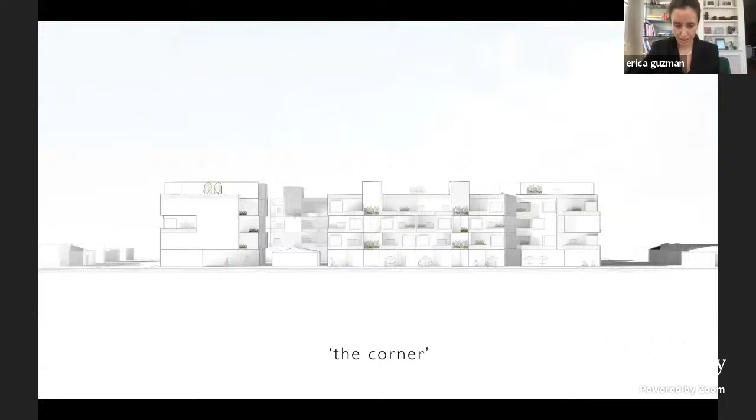You can see my screen, right? Yes, perfect. Okay, and you see it changing, right? Yep, yep. Okay, hi, my name is Erica. I'm a first-year undergrad under the guidance of Professor Jover. I'm sorry, I'm not an undergrad, I'm a graduate. I'm off to a great start. Under the guidance of Professor Jover.

This semester we focused on designing a collective housing unit that created opportunities for mixed use, collective amenities, and mixed income to cohabitate within an urban block. In creating the design for my intentional community, I wanted to avoid a prescriptive theme based on shared interest, as is the typical narrative of intentional communities. My thinking is we need less tribalism.

So instead, I started my design by analyzing which features make for the most desirable experiences within the urban landscape: a robust neighborhood with vibrant people, vibrant public spaces, easily accessible green space, but also private access to outdoor space, as well as a short commute time. This is how I came to the name 'The Corner,' in the sense that it is a coming together of many people, but it is also a reference to the geometry of the right triangle, which I explored.

To better understand the efficiency of communal living in small spaces, we designed 3 homes: the horizontal, the vertical, and the sectional. Both the horizontal and sectional homes directly inform the design of the urban block, both in keeping with the design features, but also further exploring the geometry. The horizontal home was a 1,400 square foot home designed for a family of 5, based on a riad-style inner courtyard with several porches off the private rooms. The sectional home was also 1,400 square feet, with a narrow footprint at the ground that evolved into rotating right triangles.

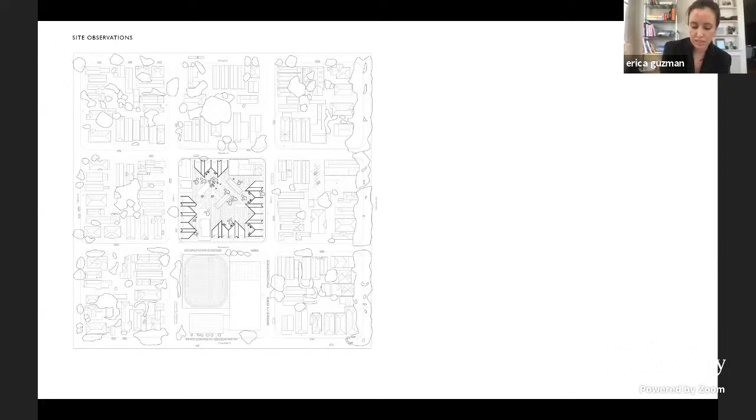The site, which was considered, is a populated, vibrant area with 3 existing properties. Like most of New Orleans, the porch culture is part of the built experience throughout the neighborhood, and I was cognizant of continuing this custom.

As for precedent, the scheme has evolved a good bit since my conceptual inspiration was Jean Renaudie's housing complex in France. I was fascinated by the mesh that was created within the structure and the other spaces, and I wanted to encapsulate this to fit within an urban block. I read that the architect also designed pocket gardens at the time, on each of the balconies, containing a depth of soil sufficient to grow trees. So it's very interesting to see how this has evolved.

The ground floor features almost a perimeter of public spaces accessible via the sidewalk. Inlets within the folds of the building create space for outdoor activities, specifically outdoor seating for cafes and restaurants.

One can access the vertical core from the sidewalks to enter the living space on the floor above. These vertical cores can also be accessed from the inner courtyard. There are 5 entrance points to the inner courtyard.

To allow for greater privacy, the corners of the entrances are all set for community use, not public use. The buildings in the inner courtyards are designated for community access for programs such as office space, gym, and clubhouse.

The various walkways were created by extending the geometry of the structures, creating meandering pathways and providing for easy circulation throughout the site.

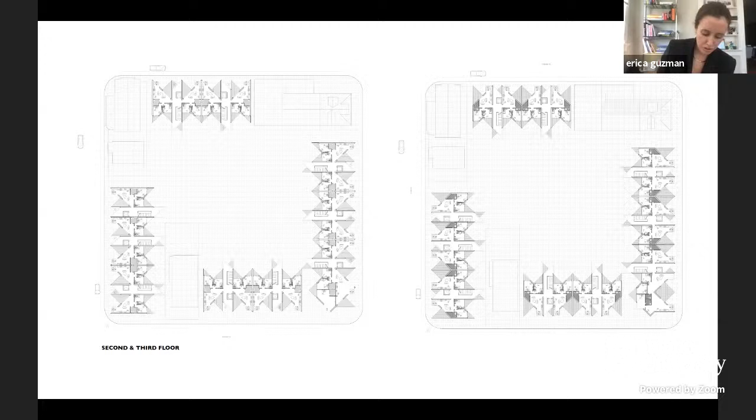On the 4th floor, I designed units that feature home offices with completely private entrances for clients or employees. I felt the growing necessity of home offices after the year that we've had.

There are 3 typologies, and over to the right is how the different units are allocated within the space.

Vegetation and green space were huge considerations. In increasing density, I wanted to be mindful of not designing a concrete jungle. Instead, inner courtyards are envisioned as a green oasis with varying sizes and degrees of courtyards.

So this is a view from inside the courtyard.

This is the corner of Berrine and Jean Street. I wanted to represent how the building interacts with the rest of the community. The facades on the ground floor are glass.

And then this is a view from the 4th floor. The views were also important in consideration in designing the small porches.

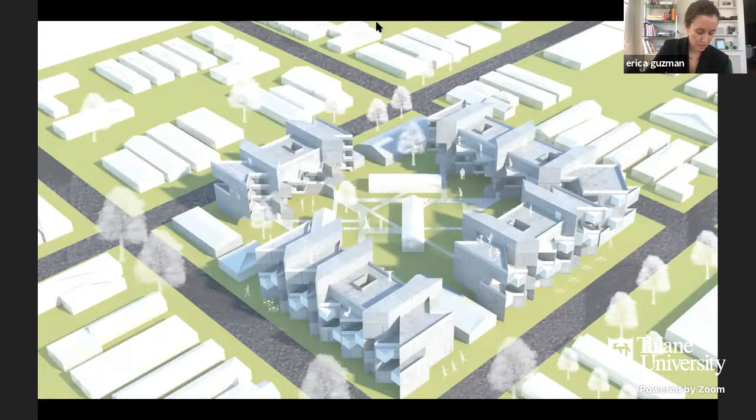And one final view from Jean Street. Thank you.

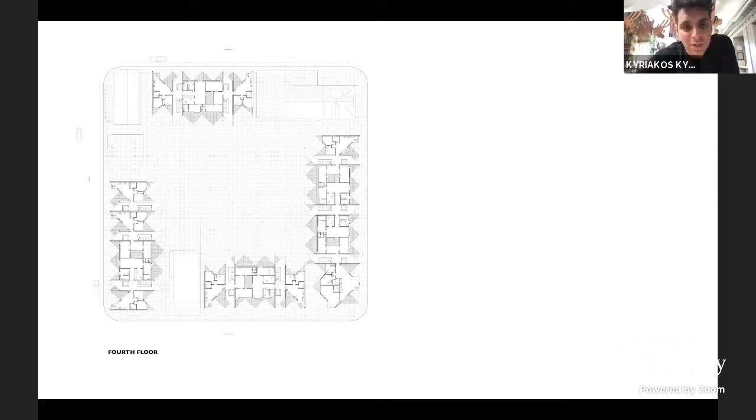I'm not sure—I would have to look at the other plan, the one below, which is more of a typical floor plan, and perhaps zooming in you can see the units. Or you don't have a typical floor plan, like a third floor or something.

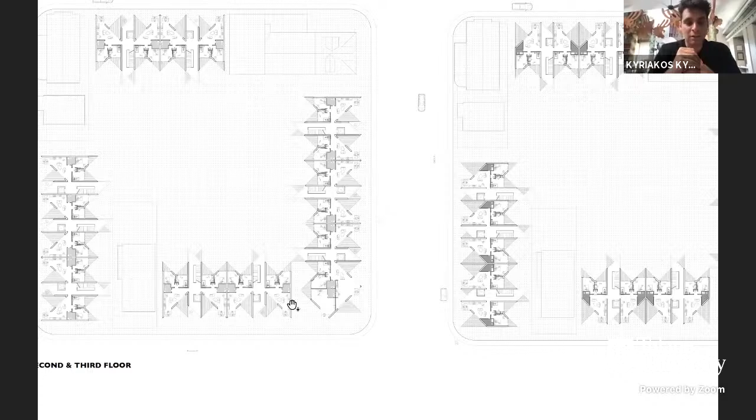I would be very interested in understanding better how the vernacular of the rectangular porch, which is prominent in New Orleans, translates here. Because that has a very particular frontal orientation, and here you're shifting things and creating complex, interesting spaces. But I think there's also some sort of interiority in the spaces this operation produces. We see, for example, a lot of those windows through the triangular balcony facing walls, so they're much more private than a porch, which naturally opens up around the building.

So would you like to talk to us about this a little more? Certainly the balconies, a lot of thought went into them as far as what would be an appropriate size for public balconies out onto the street, balconies going into the courtyard, and balconies that were primarily for private use, off of bedrooms. Other balconies were obviously not the size of a typical New Orleans porch. The public ones open to the street were meant to create interaction with the street, both on a public level and within the community, close enough that you can see the various balconies and the people on them.

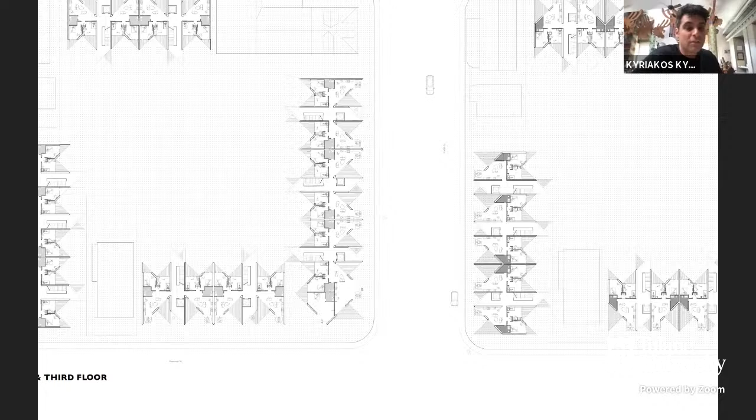I think there is, and it's very interesting what you're suggesting. There's an important difference you have to realize: in the traditional porch, the building wall and window are parallel to the face of the porch. Here you're proposing a rotation, where the window looks to a certain direction and the balcony looks to another direction via the triangle, which produces, in my view, a very different kind of experience. The balcony becomes a filter, and somebody can choose to be open, to be on the balcony and expand their field of view and be very social. But at the same time, being inside becomes very private and almost secluded, which is a very interesting quality in this design. But I'm not sure how much you've realized it, how much you're able to articulate it as a quality and a driving force in designing this project.

I think the idea of the 45-degree angle in architecture is tricky to use, because most of the time the architecture that comes out of it is very difficult to work with. It's a constraint more than anything else. I think you did a good job. Looking at the units and how you designed them, I think you did a very good job addressing this issue and coming up with a fairly good layout for the units.

My question, and I imagine it's only one semester and there's a lot to think about and tackle in one semester, but maybe for the future, one thing to consider is, as you work with this rotation of the plan, think about the orientation of the units. They seem to be copy and paste with little variation. But if you think of the orientation of the units in relation to light, sun, and directionality, you might start to iterate and play with a variety of layouts or ways of setting up the units, the balconies, the overhangs, and the shading devices that you create with the balconies—something more specific to the orientation.

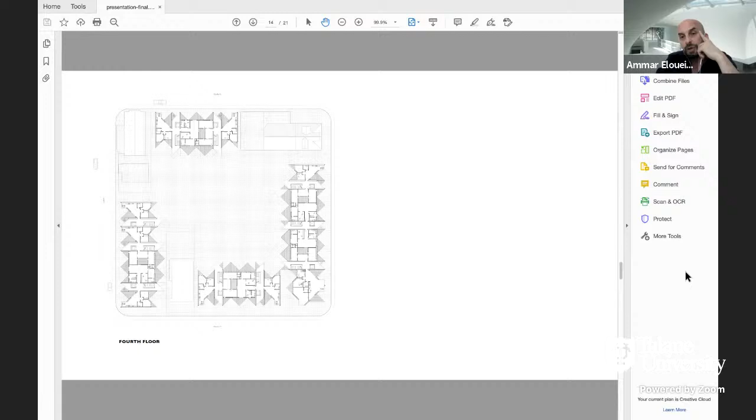Okay, I know I just said zoom it to one of the units, but now if you zoom back to the block, or what we're seeing here, it seems there isn't a lot of variety between, let's say, the east, south, north, and west in terms of the units. We know that in this context, the context of the city, water is a very important aspect, but also the orientation of any architecture in relation to the sun is a key one that you can work with and get something out of architecturally.

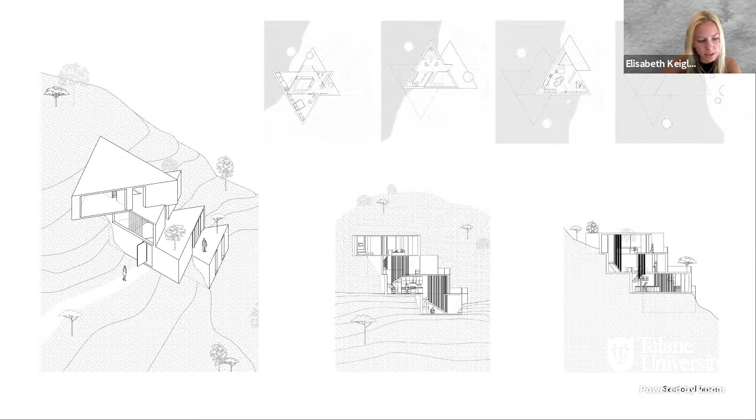Both the horizontal and sectional home projects propelled the design for the collective housing project as a basis for the unit plans and structure.

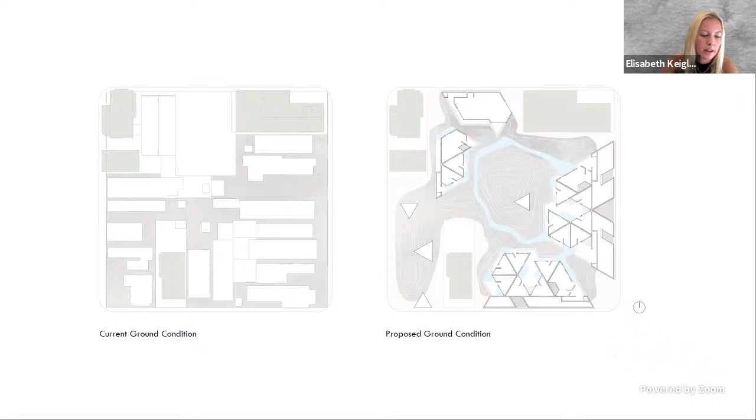The diagram on the left here is the current ground condition that has very minimal green space surrounding the existing home. And on the right shows the proposed changes of introducing topography and water and the new building massing with an emphasis on double height and triple height courtyard spaces embedded within the unit blocks.

The central park and circulating river is surrounded by the units and public amenities and enveloped by the outer facade. From the street, the complex geometries of the interior space is hidden and revealed upon entry to the site.

There's open space with a couple of amenities for the public on the southwest quadrant because, as we saw in the site analysis, there's a school located on the block south of the site, and that way the space is open to the public and invites people to enter the park.

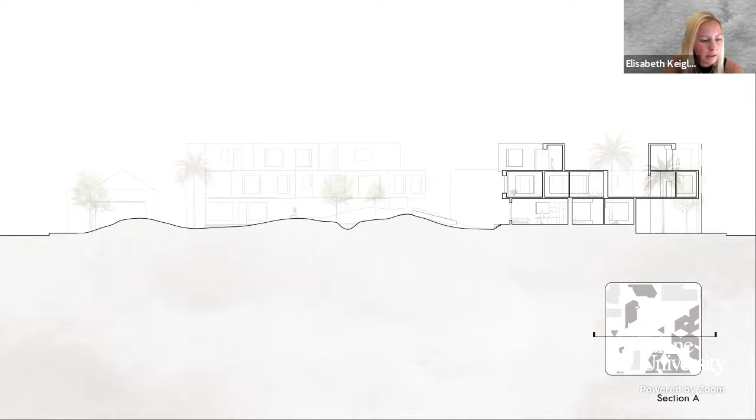Here, the section cuts through the third level pool and two of the unit blocks. You can also see how the total height of the project does not exceed that of the existing buildings remaining on the site. Since it's a little confusing to read the different angles of the units in section, I tried a section perspective view to give some more visual depth.

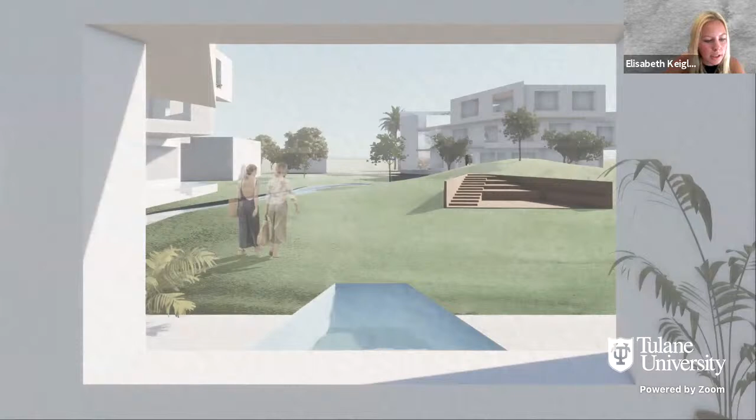This first perspective is a view from the street depicting the outer facade and one of the main entry points into the community. Here is a view from inside a unit looking out at the park and the terrace seating area. This shows the third level pool and its relationship to the upper level units. This perspective illustrates the park environment and the active lifestyle.

Since the housing project is intended for students, the majority of units are small typology with one bedroom, one bath. Because of the layout of the communal terraces, there's a lot of opportunity to engage with your neighbors still. The medium unit...

The medium unit typology has two bedrooms, two baths with varying views from each bedroom. And the largest units all have an interior courtyard to provide more light, and each bedroom has either a private terrace or a view of the park and water.

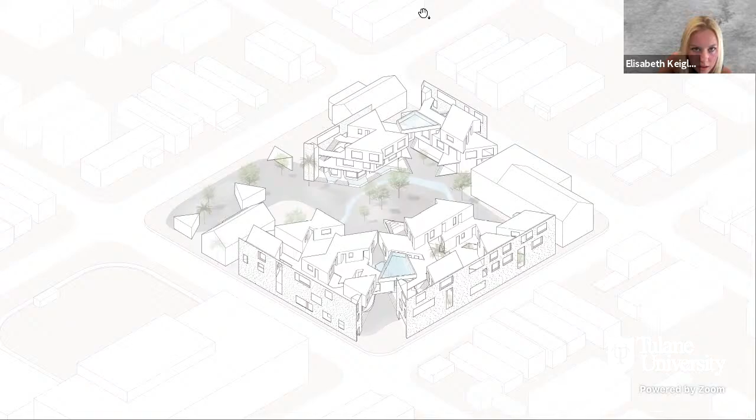And then this is again the axon, and I can switch over my screen to share my animated axon.

And that's it. Thank you so much for listening.

Thank you, Elisabeth. Great presentation, very interesting work. I'm going to keep going with my maybe theme this afternoon in materiality.

It seems that you worked on some type of screen system on the outside where the commercial spaces are, and there is something else happening where the units are in the back. Is that correct?

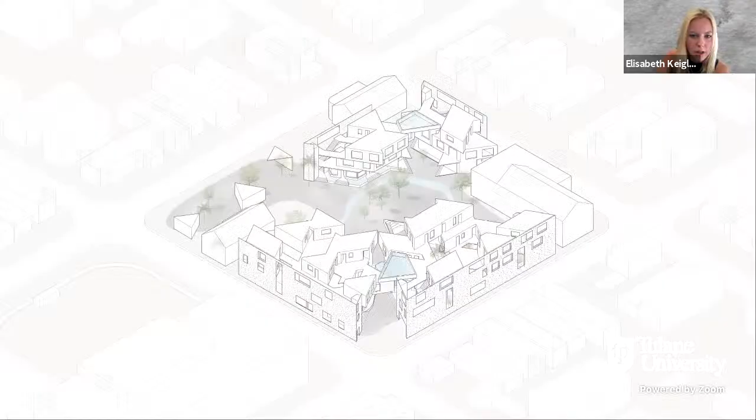Sorry, I can go back to that slide. For materiality, I was thinking, here, do you mean in this?

Yes, I was thinking about using a perforated metal for the outer shell facade, just so that it provides light in an interesting pattern on the structure inside, and also kind of gives a protecting outer shell for the entire community.

And I was inspired by Jonathan Tate with his perforated metal. We had a field trip earlier this semester to one of his projects, and that's why I chose this type of perforated metal for the facade here.

And then on the inside, I'm not an expert on materials yet. I'm excited to learn more about that next semester, but I was thinking just a plain material that wouldn't distract too much because it already is such a complex geometry. I wouldn't want to make it too extravagant with a really exciting material.

I'm not sure though. And on the first floor facing the street, is it all commercial spaces opening to the street? Yeah, around, it's easier to see in plan. I can go up to that.

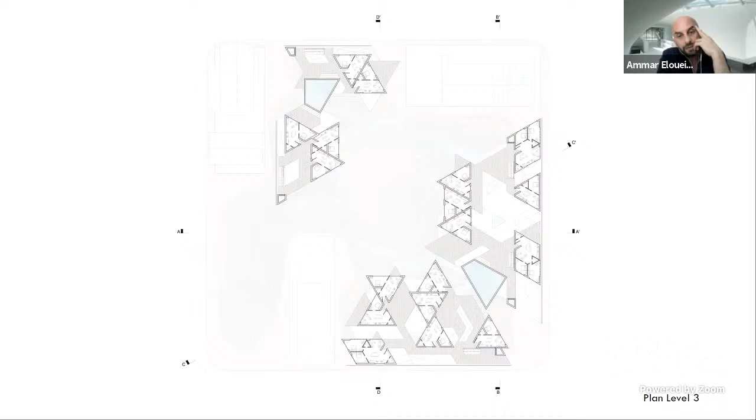I have another question about that water - besides the pools on the third level, on the ground level it seems you have some water feature running in the middle of the courtyard and around the building. Can you describe what that water is doing? Yeah, I wanted to have this kind of central park area for residents with more of a divide from the outside, just because in the southwest quadrant it's very open to the public since there's a school, inviting people to come in. But the more central area is divided by that river, to give it more of a divide between the very public and the residential public space. The small reflecting pools are located where the windows are to the units, so people couldn't walk up to someone's window - it gives a little more of a natural divide and privacy.

Is that connected at all to some water retention or water management on site? Yeah, I did - the river is also because I introduced topography, so it would be kind of a runoff collection, creating more circulation for a natural cooling system. I'm not an expert in that either, but I was thinking ahead how that could function as a water runoff collection area, and from the upper buildings those pools can collect water too through a system of drainage.

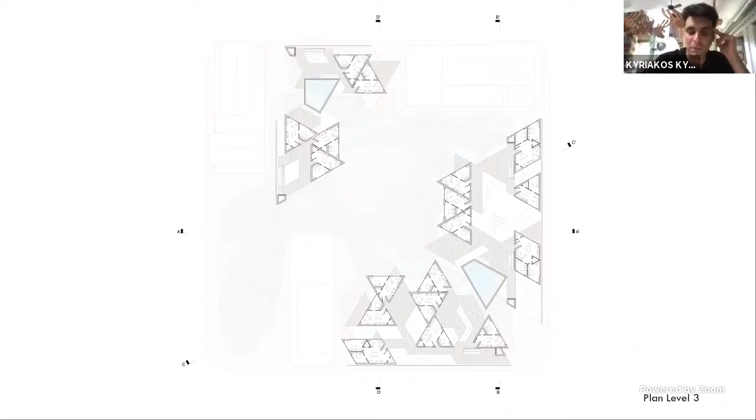It's unclear. They're empty, for example. There's no furniture. There could be indications of some sort of life or activity.

Yeah, I agree. I think for the development of these illustrations, I would include more. Here I began in the close-up plan because it's a little bit harder to read in such a zoomed-out plan. I added some tables for people and kind of more vegetation to create more life. But I agree, it would be more interesting and beneficial to have some designated programs.

I'm not sure I agree with that. I like the fact that they are unprogrammed. It reminds me a little bit of Tschumi and Le Fresnoy, his project in Le Fresnoy, and other projects he worked on, where he talks about these unprogrammed spaces. And if we're talking about housing for students, you can be assured that students will make use of that space, whether it's for gathering.

Sometimes as architects, we want to program everything and be a little bit too heavy-handed in saying this is how people will use that space, and this is how people are supposed to act or react in that space.

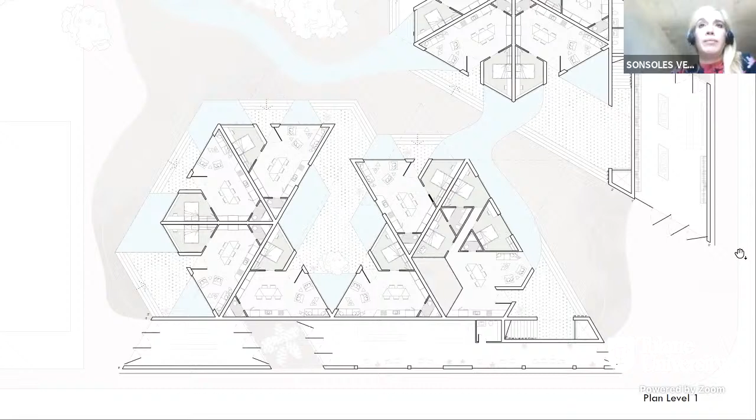I don't believe I am. You know, look up Parc de la Villette. Yeah, he did Parc de la Villette. I've seen some diagrams of him in lecture. Oh, okay, that park is from that. Yeah, I think I remember. I know what you're talking about.

In some of his projects, he talks a lot about these unprogrammed spaces, specifically in a project called Le Fresnoy that he did. It's an art school. To me, it would be interesting to explore this more than in the drawing, because drawings have a tendency to fix things—if you start putting a ping pong table, people think that's the only use of that space.

But more in the presentation of your project, or in your diagrams—because you showed the circulation in axon and how people navigate the space, you showed the units, you showed what the areas are—I think that could be another one of those diagrams where you call it 'unprogrammed spaces,' pointing at it as something intentionally designed that way. You thought about it, and you don't want it to be too specific. You can go on and imagine scenarios, but if you do that, you have to show more than one, showing the versatility of that space and how it can be used in different conditions.

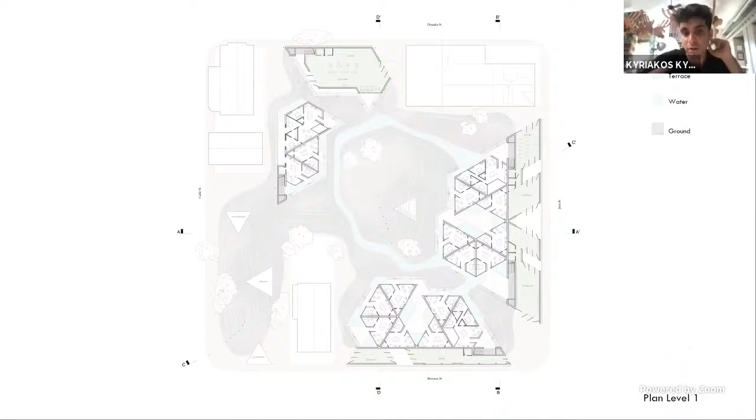I'm wondering, because I see you make this move with a screen that defines a very precise border, a very precise outline for the project, and that courtyard is somehow like a hidden world in there. I'm wondering if some gesture could happen on that part to define this interior world more privately, but also potentially become an opportunity for a smaller building, maybe an outdoor one—maybe a trellis construction that collaborates with the school across the street and the traffic, where parents can wait for their children under some trellises, working with the ice cream shop. I know it's an extra to the brief, to what you were asked to do here, but I think it would be a very interesting intervention, which would help you on one hand better define this interior world you're trying to build, and on the other hand create a more substantial intervention at this corner, considering the context—which I think is a very smart idea you're proposing.

I agree. I definitely think maybe one thing I could do if I were to further develop this would be to create a rock wall, because in this gym the whole concept is based on an active lifestyle and outdoor space. So maybe create a rock wall where kids could play after school and stuff like that, and that would also create more of an enclosure, possibly.

One of the premises of the project was densifying the blocks. Was there a specific number of units that was required?

Yeah, so we were told 60 units. I think there was a little bit of variation, but mine is exactly 60 units, with a majority of them being... I can go to the programmatic sheet. I have 45 small units, I believe, and then 8 medium units and 7 large units.

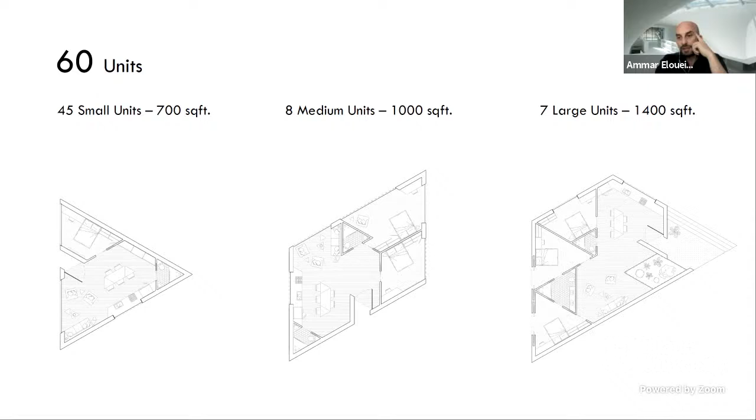Because it appears, looking at the site plan or the floor plan, it appears very light footprint on the site. It's amazing that you were able to fit in the 60 units, and you can imagine how you could easily add more units if needed, on that corner, or in other places.

And I think part of it also has to do with the way you're breaking the corners, breaking away from the corners and letting people in. That's an interesting choice, but also the commercial or amenities on the ground floor and the units above. So it's still a relatively tall building if you think about it in context, but the treatment through materials and how you arrange the units more towards the back of the block helps a lot in minimizing the visual impact of the density.

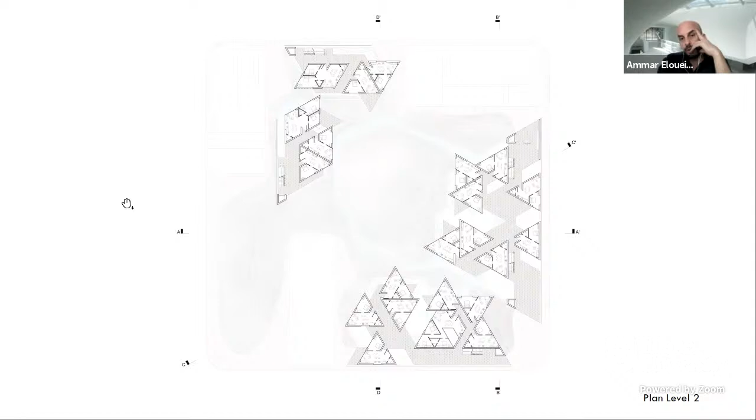So these are good points in terms of how you're resolving the issue, because you can imagine if everything was fronting the sidewalk, the building would appear out of context, or massive in scale, considering the height. I imagine you're going to the height limit, which is around 45 feet or so.

Yeah, I'm not sure exactly what the New Orleans height limit is, but I tried to keep it in relation to the buildings on the site and the buildings around it as well.

Good, great. Do you have any questions for us?

I guess maybe, I was debating whether or not to do sections, section perspectives, or elevations. I don't know, I'm really interested in digital renderings and illustrating things. If you had any advice on how I could further develop these.

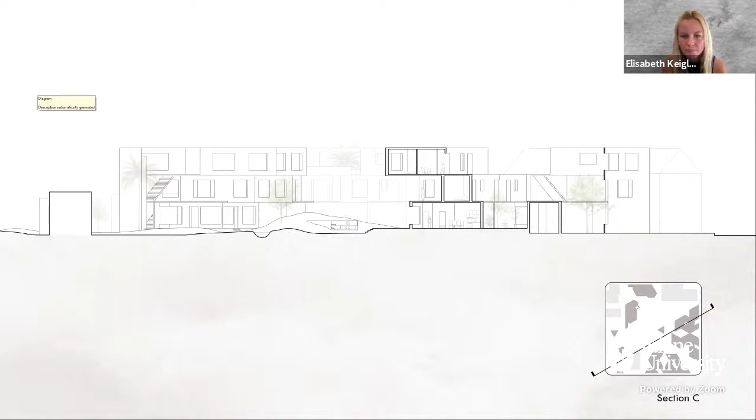Because of the 60 degree angle that you're using, it's really hard to work with. The sections are very beautiful, but they tell us a story about the units. They talk about the interior spaces versus the outdoor spaces, and so forth. But it's hard to grasp the project with the conventional drawing.

So you might think about ways of representing the project, whether through isometric views or something that further describes the comment about it being hard to grasp the three-dimensionality of the project. There's a lot of complexity, and that complexity is due to the 60-degree angle and the shifting from one level to the other. So I don't think section perspective or traditional sections will do justice to, or help understand, that.

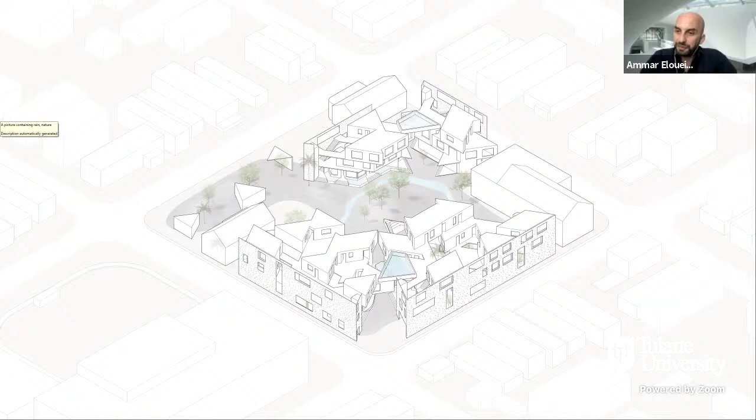I think isometric views like this one, and if you start to do it at multiple levels, some kind of exploded views, or physical, old-fashioned physical models are always a good way of describing a project of this nature. Okay, yeah, I agree.

Well, since you brought up the question of elevation, I actually have one more question for you regarding the way you render it and the decisions in the materials.

Basically, when we look from the inside, like from the courtyard side, all these triangle spaces have this very almost Mediterranean look, like white stucco. They seem to be very thick and heavy. But then when we look at the plans, they're suggesting a much more lightweight type of architecture. The exterior walls are very thin.

They have large openings. Also, if we look at your references from Frank Lloyd Wright, it suggests a more layered architecture, which is also, I mean, what your concept is about, with all these platforms that we've been talking about earlier.

So I'm wondering if there could be a different way to look at the project, a less volumetric approach, and maybe one that is emphasized on the kind of planes that construct this three-dimensional space.

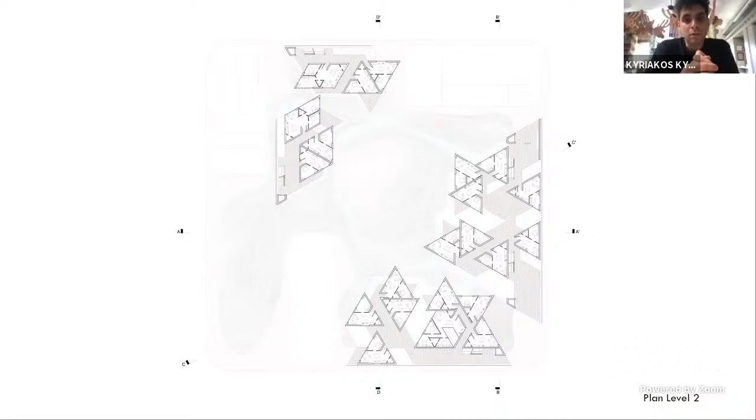And that more cave-like—well, maybe not cave-like, but more volumetric—image that you're suggesting with the interior views of the courtyard.

Okay, I think that we need to move to the next student.

I'm sorry, Kyriakos, just a quick comment, last comment about the isometric view that you were showing and the treatment of the fenestrations, the openings in that screen on the street facade. I think the idea of using openings that are not directly in correlation with the apartments, but start to have a different scale of their own and tell a different story, is a really interesting strategy.

And you can even further that by not necessarily working with the three levels that you have, but combining different levels or shifting those openings to help minimize the impact of that height in terms of the scale of the building. Good work, thank you so much.

Hello, Ammar. Hello, hi Andrea. Kyriakos, hello.

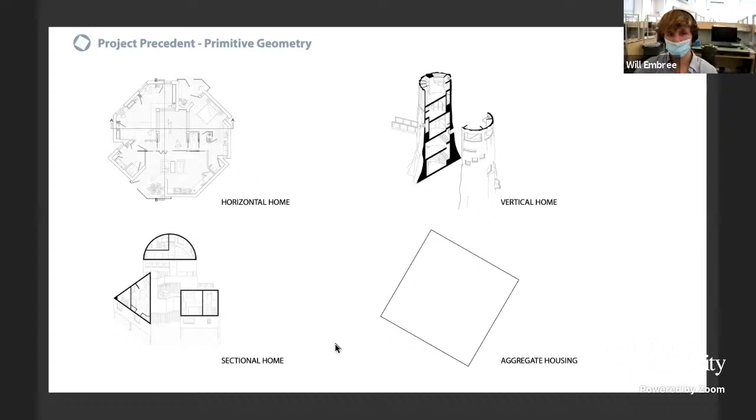The buildup of this project is derived from previous projects in which I challenged myself to design around primitive geometry. The horizontal home design was in the shape of an octagon, in which I was exposed to both obtuse and acute angles and created a division of spaces for the children, parents, and their guests.

The vertical home was a house inside of a tree, in which I used circular floor plans and radial organization to create a home for 5 college students taking classes on Zoom.

In the sectional home, I explored primitive shapes in both the vertical and horizontal planes, using exterior walkways and stairs to connect the different spaces.

In this project, I sought out design elements inherent to the city of New Orleans. I found the most compelling elements to be exterior patios, iron railings, and cast iron columns.

In addition to designing this project with elements of commercial New Orleans, I also wanted to create a seamless immersion into the residential neighborhood, which I found exposure to in the porch assignment.

I also addressed how different subgroups of the community would interact with the project and created different thresholds of engagement for public, communal, private, and nomadic use. Informing different thresholds within the block was an important design step, as nomadic people lead uncommon lives.

Nomadic and settled people speak of homes and space in words and assumptions that don't make sense to each other. Designing a commonwealth unshared with the settled majority is crucial in furnishing a sense of community and safety for a group unseen to the New Orleans eye.

With all that in mind, I began designing. Traditional housing is rooted in design principles and programs for more permanent, place-based housing.

Nomadic housing is contingent on a sense of space, home, and community that is intimately related to moving over the land. In establishing a basis for the structure, I re-envisioned the urban grid and implemented an unconventional 30-degree grid informed by this unconventional manner of nomadic housing.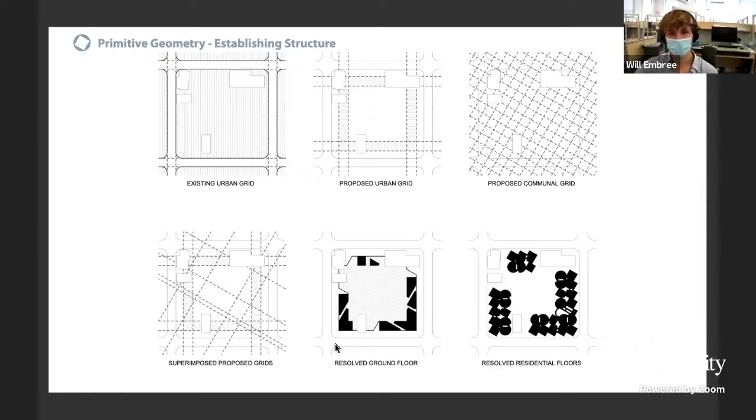This grid then produced a base for public and private structures. In terms of creating different thresholds of access, I altered the existing vehicular, public, and communal circulation of the block. Public access is defined by orthogonal movement, whereas communal access is defined by 30 and 60-degree entries and walkways.

I also designed a gate that secures the community. Wait, sorry, that's for this one.

I refined the community's intrinsic New Orleans value by designing an exterior patio that wraps around the structure and also created a columnar grid. I also designed an authentic community emblem that uses the Pontalba buildings as a precedent. The N stands for NOLA Nomads.

I finally honed in on the manner in which the different categories of nomads, the public and the community, would use the space. On the ground floor, I designed an 8-slot RV parking lot for the auto nomads, 3 workspace buildings for the digital nomads, which are also open to the public, in addition to a typical New Orleans exterior patio that wraps around the complex, and an interior courtyard for communal use.

On the residential floors, there are 58 housing units for the leasing nomads and 12 campgrounds for the peripatetic nomads.

This concept axonometric facilitates a clear presentation of the specifics of the community. You can see the primitive geometric nature of the buildings and infrastructure, New Orleans idiosyncrasies, areas of community engagement, and the different spaces outlined for the nomads.

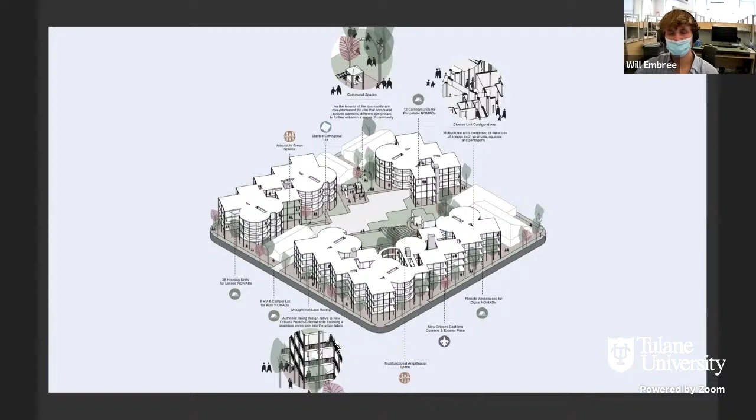The ground floor plan shows the communal areas, the different public and private buildings defined by the vertical cores, and the exterior patio imposed by the upper floors.

This zoom of the ground floor plan accentuates one of the public buildings on the left, the columnar grid, and a private entry at 60 degrees. One of the communal buildings has 3 bathrooms and storage spaces for the campgrounds above, a communal laundry room, and a cafe.

The second floor plan is a typical layout of the apartments. You'll note that on the exterior of most apartments, pocket parks are used to create a division between units. Because the apartments are modular, they are easily subject to change within the perimeter of the walkway. Within this module, 4 campgrounds are included on each floor.

On the third floor, the unit configuration changes and the voids in between the apartments are introduced in place of the lower pocket parks to create a sense of privacy.

And finally, the unit configuration on the fourth floor plan is the same as the second.

Here's a zoom of the second floor plan in which you can clearly see the pocket parks, typical unit configurations, and one of the campground sites. The inclusion of campgrounds was a key part of this project, as peripatetic nomads are the architects behind the nomadic lifestyle. The act of camping is so appealing because it provides an escape from the permanent and invigorates the primal interest of living in a primitive hut, again redefining what it means to be houseless.

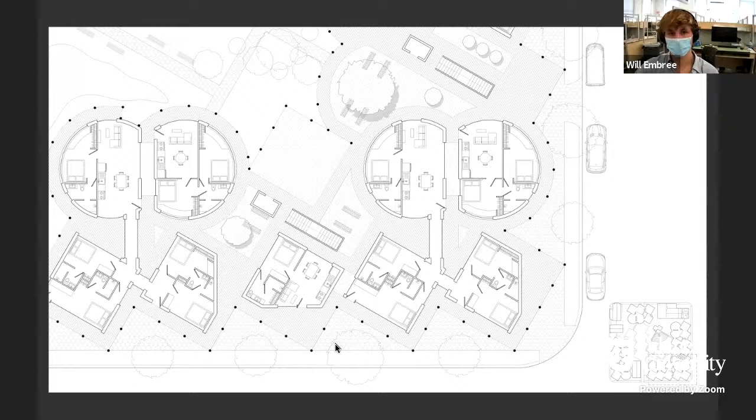Here's the urban block roof plan, which shows how the lot is integrated into the urban grid and how the 30-degree grid was refined within the block.

There are 4 different unit configurations, the first being the 1 module with 1 bedroom and 1 bathroom, ideal for single or 2-person use. The second being the converted 1 module, still only with 1 unit, but a slightly larger floor plan, with 2 bedrooms and 1 bath, ideal for small families or roommates.

The third being the 2 module, composed of 2 units with 3 bedrooms and 3 baths. This is ideal for medium-sized families. The last unit configuration is the 3 module, composed of 3 units with 5 bedrooms and 4 bathrooms, ideal for larger families.

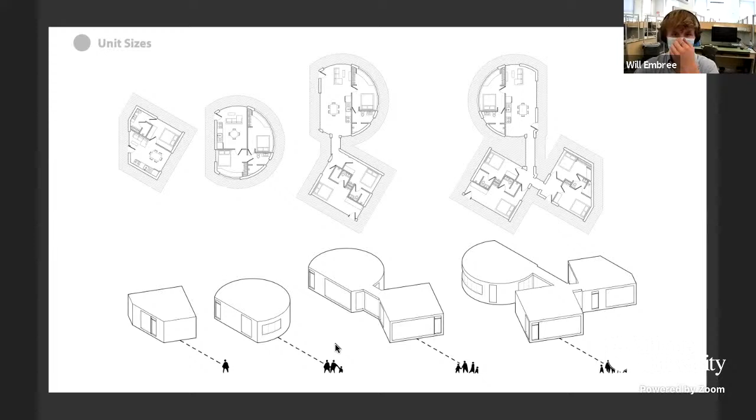What makes this community unique is that all tenants are non-permanent. Leases for the units are renewable every 2 years, and all tenants pay dues to the homeowners association and collectively own the land. Visitors renting either an RV lot or a campground have a maximum of a 2-week stay. This regulation of residency ensures that all users stay true to their mobile nature.

This first section shows the community with the site context and arrangement of units, public spaces, and pocket parks.

My next section, did that work? No? Okay, wait, hold on.

Okay. This sectional animation clearly illustrates the arrangement of nomadic spaces.

Can you guys hear that? Yes.

You can see the leased units, RV lots, the amphitheater in the courtyard, the adaptable campgrounds, the flexible workspaces, and the exterior patio. Here's a perspective of the amphitheater and the complex.

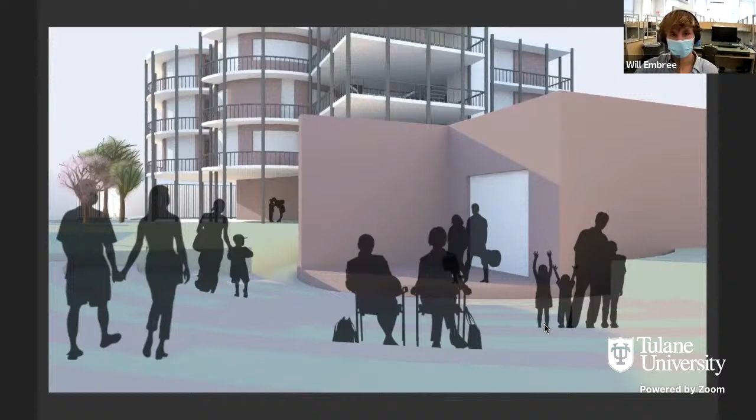Here's another perspective taken from the 3rd floor walkway, showing how elements of the 2nd floor pocket parks extend into the voids of the upper floors.

And then I have one last animation to share. And you guys heard the last one, right? Oh wait, no, not this one.

Where's it going? Hold on. Okay, for some reason the animation is not playing. I don't know why.

Just to clarify a little bit, you mentioned something about the RVs on the ground floor, rentable space. Can you go back to that and show us how does that work? And how many of these can you have on that block?

All right. So on the ground floor plan, there's an 8-slot RV lot, and it redefines the vehicular circulation of the block and opens the road up into the middle of the block.

So the RVs can park in that area in the center. That's the 8 units? Yes.

Got it. And do they have access to, let's say, water or any other facilities on the site, power? This building right over here is designated for the RV lots, and it has bathrooms with showers, also storage spaces, and public restrooms. Yeah, and that's just for them.

The RVs are substituting units in the overall program, or is it an addition that you bring? It's an addition. So the required unit we had to meet for this project was 60 units, and I had 58 units and then 12 campgrounds, and then the 8 slots for the RVs.

And you spoke about several kinds of nomadic life. Are there other ways in which this building hosts temporary tenants, or is everything else fixed? I mean, are there short-term units that people rent for shorter terms, like monthly, or other more temporal ways of inhabiting?

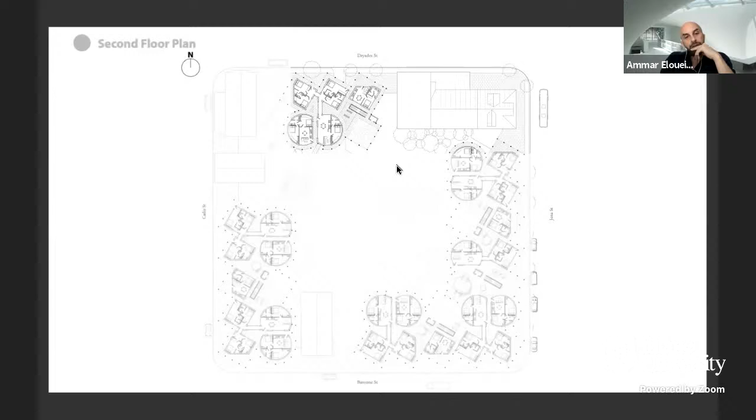So that space can hold all the tenants at the same time? Yeah, ideally, yes. Shifting a little in terms of the questions, your units seem to have two types: the circular one and the square one. What motivated the geometrical choices of a circular plan versus the square one, and how do these work together?

All of the previous projects of my semester have included shapes such as circles and squares, and I really wanted to reemphasize that, including them in a 30 and 60 degree manner. There's also a third shape, the pentagon, which is combined with them in these larger units, and can also be a singular unit.

But in fact, it's not that they are working together, they are independent. Either you have the circular, which is not a complete circle, always kind of truncated, or you have the square unit type, and there's a link between them. So when you're showing the 3-bedroom or larger units with both the square and circular plan, they're not combined together per se. They're juxtaposed, sitting next to each other.

How do you see that working? Is there something about the dialogue between what is ultimately cylindrical and these more rectilinear spaces? How do you see these two things working spatially?

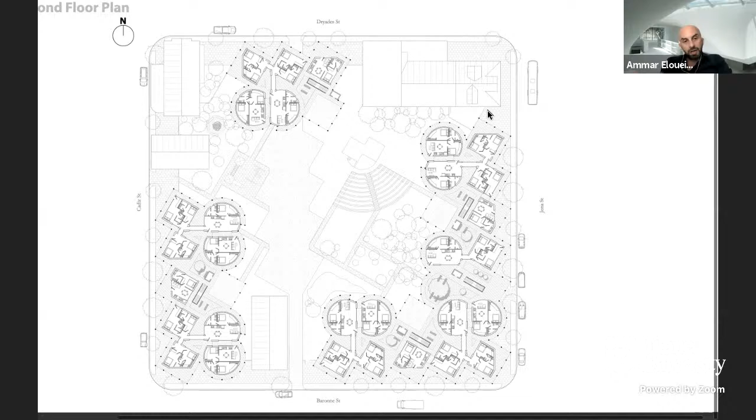There was one image on one of the walkways outside—if you want to go back to it and describe how these spaces are working together. Was it this one? It was a rendering of an outdoor space. Yes. Can you describe a little more that experience of being in that space, in the walkway between the different modules?

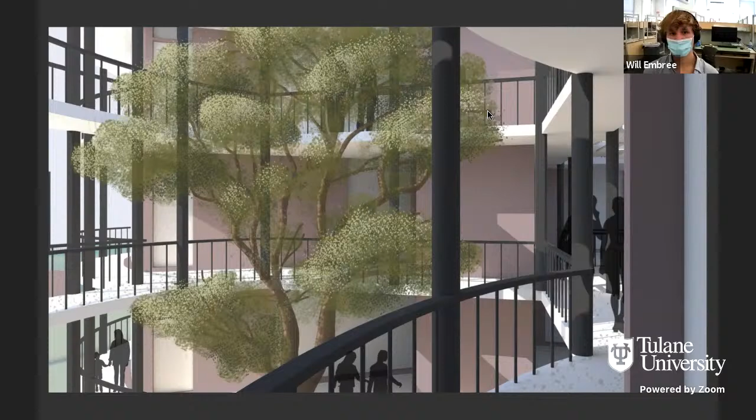Yes. So it was kind of a precedent that I continued throughout my entire semester. In my sectional home unit, I only used exterior walkways to connect the shapes, just to preserve that primitive geometric nature, and I wanted to do the same in this project. It also helps create a grid that is adaptable—had I combined them into singular shapes, it would have been much more difficult to create this adaptable grid that can be changed on the upper floors.

But it also seems that you have an intention of bringing some of the structure to the outside and making it very present. Is that correct? Yes. What is the motivation behind that? I'm not sure if I had one.

I honestly just really like the idea of moving from one shape to the other and having different spaces. The nomadic architecture in itself is about using a space at different times, on different days, and in different areas, so I really like the idea of moving from one module to the other.

But the idea of nomadic—conceptually, the nomad, or how it can translate as an idea to architecture—is to be able to have flexibility, correct, in your location, in the way you do your activities. We were talking about the Elizabeth project earlier, and this idea of unprogrammed spaces and how they can be used in different ways creates interesting flexibility in the way you can imagine architecture.

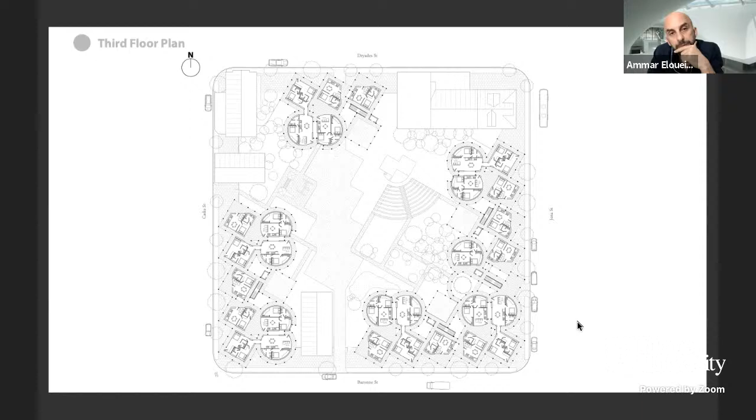Even the amphitheater appears to be very well thought out and prescribed in the way people are seated, where the stage is, and the dimension of the stage. Everything is very prescribed, and there's a lack of flexibility. I would have imagined that for someone advocating for nomad practices, there would be a little more flexibility in the project. Do you think you achieved some flexibility in the idea of nomad in your project? I certainly think I achieved a certain level of flexibility. As I explained before, the shapes are placed on a grid, and if they were combined into one shape, it would have been harder to have that grid.

I see the concerns or the question Ammar is posing here. There's a bit of confusion on what the priority is in this space. I think there's a lot of emphasis on the formal composition of the geometry, which is very attractive and very beautifully articulated, from the ground floor plan to the upper levels, in how you combine and play with the shapes. It shows a high level of craft on your end, but at the same time architecturally produces some questions that are a bit tricky.

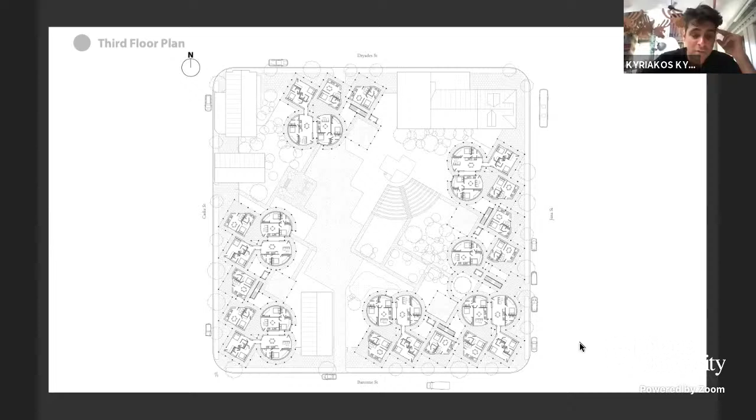I also think the ground floor is very interesting, and again your ability to work out the geometry is fantastic. I don't quite understand the 30-degree grid. I think you also said it's kind of an arbitrary decision, it doesn't come from the site, orientation, or certain views, right? Mm-hmm, yeah.

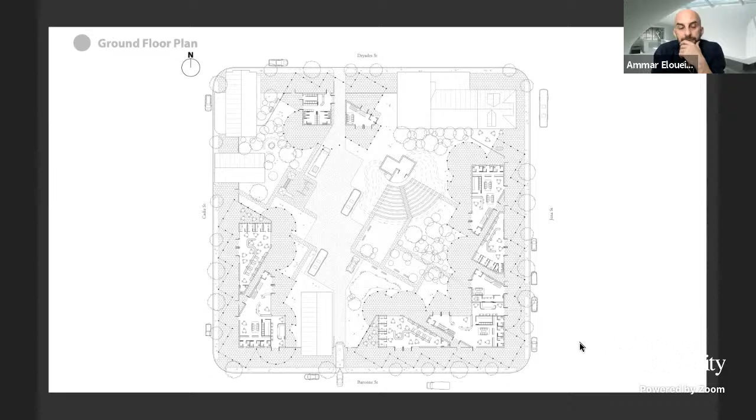Hi, my name is Miya Kutchins. I'm a second-year undergraduate student, and my professor is Professor Lockhart Milan this semester.

I kind of tried to adopt this strategy by having circular subtractions in this project as a means of collecting rainwater efficiently.

The site is completely filled with individual houses, as well as having two storefronts, and the existing nature on the site was a big source of inspiration for me in terms of where my units were placed. And the trees were clearly a beloved aspect within the community and had been there for decades.

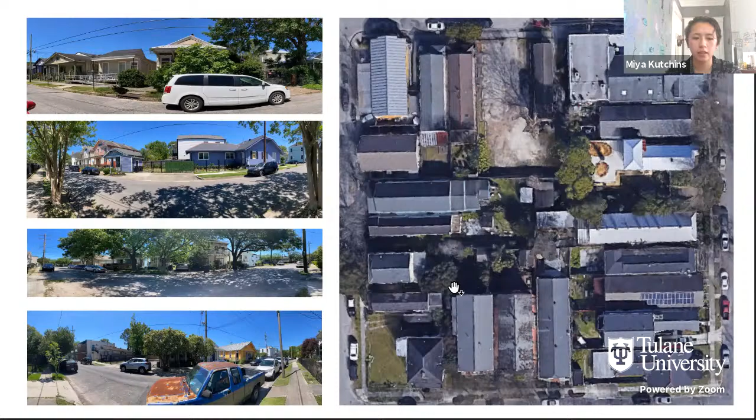In terms of the type of people that I envision in the intentional community, it would be people who are looking for natural alternatives to their ailments and desire to infuse an appreciation for and collaboration with nature into their daily lives through the practice of gardening, as well as organizing the units around water. They can live a more intentional and interconnected life with the natural world around them.

Because of this, anyone from students to small families would be able to inhabit these spaces. It's more of a philosophy than any physical kind of person who could be able to live there.

In terms of some inspiration, first I referenced various sculptures by Eduardo Chillida, whose work explores the way that simple geometric forms and their links can create a physical and visceral experience for the viewer, as well as the Sendai Mediatheque by Toyo Ito, which is a combination of orthogonal and circular forms and subtractions, which explore a more porous interaction with the fabric of the local community.

And finally, I referenced the Holly Grove Shade and Water Pavilion, designed at the Albert and Tina Small Center. It's a community amenity that focuses on rainwater collection, and its physical form becomes an area to generate curiosity and connection.

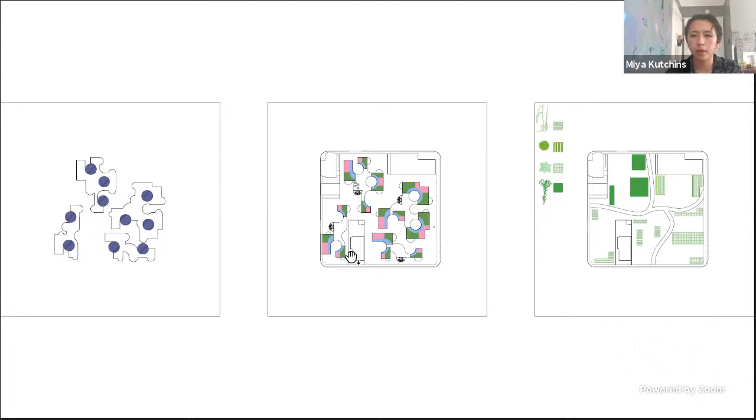Here I have a diagram of the water collection, the unit organization, as well as the apothecary on the site. The water collection happens in 10 different spaces that the units are organized around. On the ground floor, there are washing and drying units that utilize that gray water, as well as a water processing area that converts the water into usable water.

Here we have a typical floor plan, and along these circular areas, the ones touching the void, is where we have the wet zones, such as kitchens, baths, and further laundry areas.

Finally, on the floor plan, there's four different apothecary herbs and three different physical areas that are centered around apothecary. Starting at the top and going clockwise, we have evening primrose, which focuses on heart health, nerve and bone pain. The space that follows it is an apothecary processing area.

The next plant is passion flower, which relieves insomnia, stress, and general pains. The next space is a greenhouse that would grow the starts for the plants when they're smaller before they can actually be farmed. After that, there's a lemon balm plant, which improves cognitive function, eases insomnia, and reduces anxiety.

Then there's a shed that would just hold general gardening supplies. Finally, there's ginger root, which is an anti-inflammatory and immunity booster. All of the apothecary herbs were chosen specifically as ones meant to combat the ailments we feel as a result of modern life, both in terms of the pace and sitting at a computer for a really long time. That was something I wanted to focus on, finding a natural alternative to.

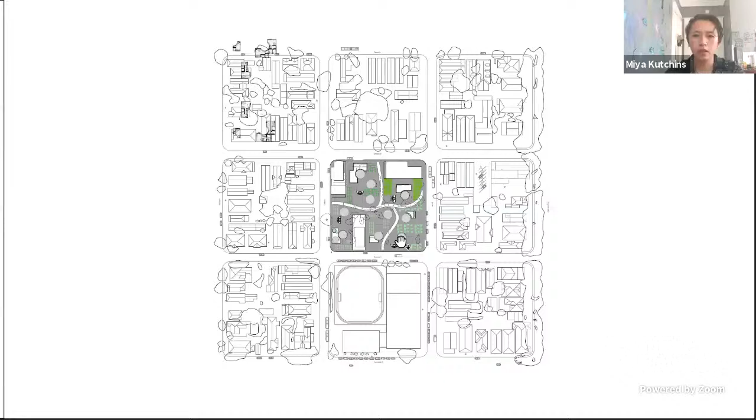Here we have a site plan showing the surrounding context of the blocks, as well as the average floor plan.

On the average floor plan, we can see that there are various flat platforms connecting the vertical cores to the entrances of each unit. On these platforms, there are various places to generate connections through the community with programmatic functions such as picnic tables, shared gardens that encircle the structures, workout areas, as well as a shared small library for reading.

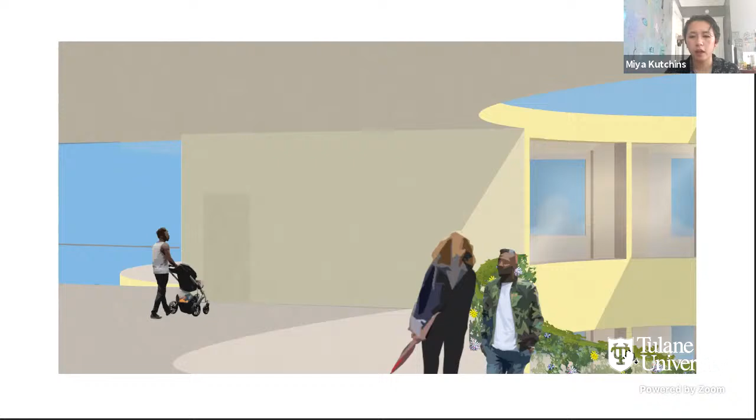In this first perspective, you can see an interaction between the sky and the railing with the aforementioned gardens that grow around it.

In this second perspective, I wanted to show the ways that the vegetation was being used, as well as the connection to the sidewalk.

In the final perspective, I wanted to show the ways that the building form also highlights the sky when you're under it. And then this is my final axonometric, a diptych that just shows both the vegetation and the rainwater collection in a more abstracted way.

We can go to the concept board, but I also have a quick animation to show, which is an axonometric view from the rainwater collection areas all the way to the top with the covered walkways.

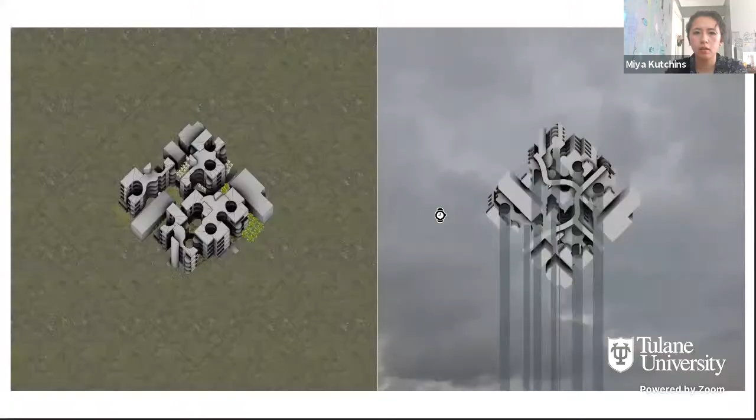So the main reasoning behind my organization was to be around the trees that already existed, and I wanted to maximize the untouched ground floor space. I didn't want big blocks of buildings covering areas that could grow vegetation, as well as having more porous entrances to the surrounding area instead of a super defined perimeter. It was really important for me that the project was about organic alternatives, so it didn't make sense to impose a harsh border given that philosophy. So, a combination of a few different reasons.

And you describe these communal spaces between the units as spill-out spaces where things can be organized more freely, but they seem to all be introverted, looking at the inside versus outside, or connected to the rest of the site. I imagine this is also your intention here.

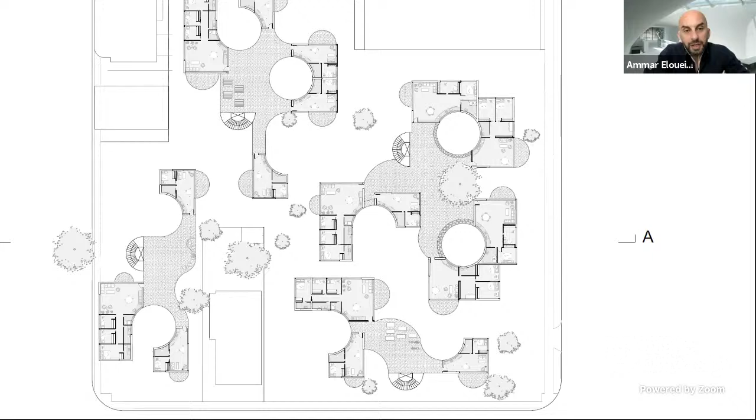By introverted, do you mean like more private? Yeah, if you look at the top right building, the gray area outside of the units is almost framed by the units, so it seems more like an outdoor space surrounded by the units, rather than something open to the outside.

Well, I was mainly just focused on having a combination of public and private outdoor spaces. So the ones that are semicircles are private, like terraces. And the program I was talking about occurs within these organic forms that are touching the vertical cores as well. But I was definitely trying to make sure there are as many different kinds of outdoor interactions possible within the organization of the units.

In the other aspect of the project, it seems you opted for something repetitive, meaning that despite the fact it's five stories tall, besides the ground floor, all the floors are the same, they repeat. Yeah, there's one or two variations - I subtracted some units in certain areas just so there would be more light available at every level, but it's almost exactly the same.

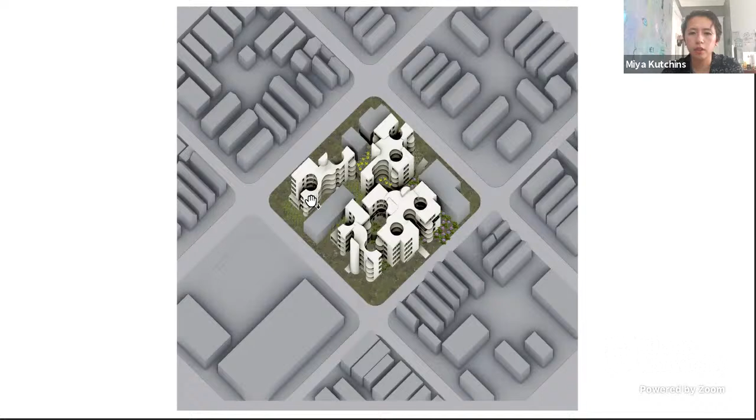Can you show us where you subtracted some of the units? Do you have these plans? Let me go to this section. Sorry, my Acrobat is taking a while to load. Oh, I guess I didn't cut through any of the areas where it is - I can show you in the isometric though. So on this one, this unit is one story shorter, and there's one missing right there, as well as right there.

Yeah, okay, but they all have the same form, definitely repeated in that one.

I mean, definitely there's something about the repetitiveness in terms of efficiency of construction and cost and all of that, but also there is the lack of variety in the way your experience is in those spaces. We looked at some projects this afternoon where, even if the units were the same, the spatial organization with the terraces and outdoor spaces were shifting, creating more variety in the experience than what you have here.

How, again I'm going to go to my question for this afternoon, the idea of materiality - what do you see your building made out of, and how does it fit in that context? Well, I was thinking my building would be made out of wood and steel. The steel would be a support on the walkways, and since I don't have any of the units touching the ground floor, I would have steel beams supporting them, just because otherwise they would fall. But I wanted wood because I thought it would incorporate with the organic focus better than concrete or all steel.

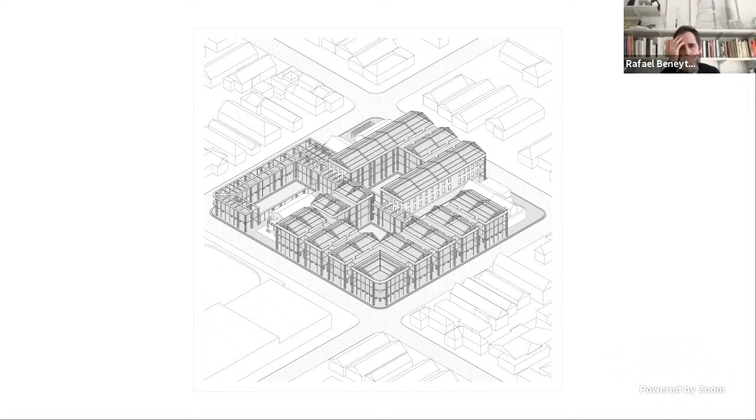The site is located 2 blocks behind the Academy of the Sacred Heart private school on St. Charles Avenue in Uptown New Orleans. The current built condition of the site is a series of timber frame single family and duplex houses which date from the 1890s to around the 1910s. All of the houses face the street, with the center of the block consisting of private backyards delineated by fences.

3 existing buildings are set to be retained: a private duplex, French Truck Coffee Shop, and Charlie's Steakhouse.

Having always had a fascination with and deep appreciation for New Orleans and its rich cultural history, the context of the city and appropriateness therein was at the forefront of the motivations for this design.

Conceptually, the project originated from the idea of taking elements of the city, such as the French Quarter, Audubon Park, the French Market, and coffee and beignet shops, all of which are emblematic of the civic nature of the city, and incorporating them into this one urban block.

The arrangement of shops on the ground floor makes for densification at the street, referencing the typical layout of the French Quarter, and results in large open air spaces in the middle of the block, emblematic of the iconic New Orleans courtyard. Large open air hallways provide connection from the street to the middle of the block.

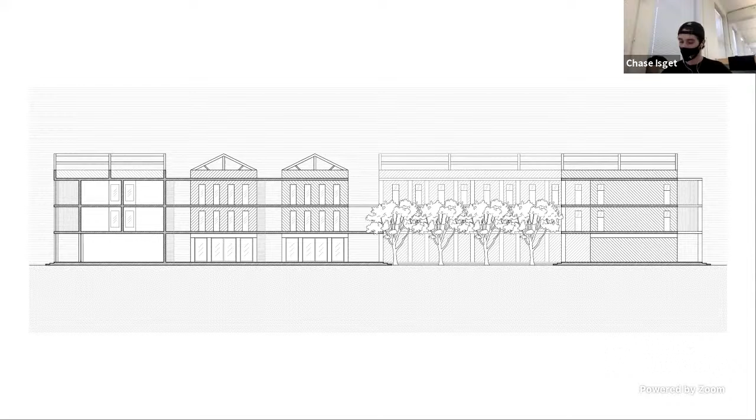As stated, this project was heavily influenced by the vernacular architecture of New Orleans and makes no qualms about expressing this relationship with its sense of traditionalism. However, the goal here is not to merely copy historic forms for the sake of reiteration.

As we can see in this elevation, this project breaks away from the mold of New Orleans traditionalism with its materiality, being a radical departure from the brick and cypress the city was largely built from. Instead, standing seam galvanized metal siding is utilized, referencing the look of clapboard that is ubiquitous to American residential houses, but installed on the diagonal and scaled up to further decontextualize and defamiliarize oneself with these traditional materials.

Additionally, steel cables are strung along the street front to define the entrance to the open air hallways for vines to eventually grow on.

With regard to the material expression of the columns, I was inspired by an art installation by Edoardo Tresoldi, where self-supporting wire mesh sculptures take on the form of classical buildings and architectural elements with remarkably high fidelity. Here we see the process of a traditional Tuscan column in the round going through a series of manipulations, eventually being expressed in this grid of wire mesh.

Through this material expression, the wire mesh column becomes a commentary on how any attempt to use a solid volumetric classical column in architecture today would be very problematic in accordance with contemporary construction methods, since it would require a hidden support in the middle to actually carry the structural load, and would therefore not be a truthful expression of materials or methods. This way, the column becomes a ghost of itself, or a memory, allowing the project to engage in seamless dialogue with the many columned houses of New Orleans, but while also simultaneously unafraid to make its own statement of modernity.

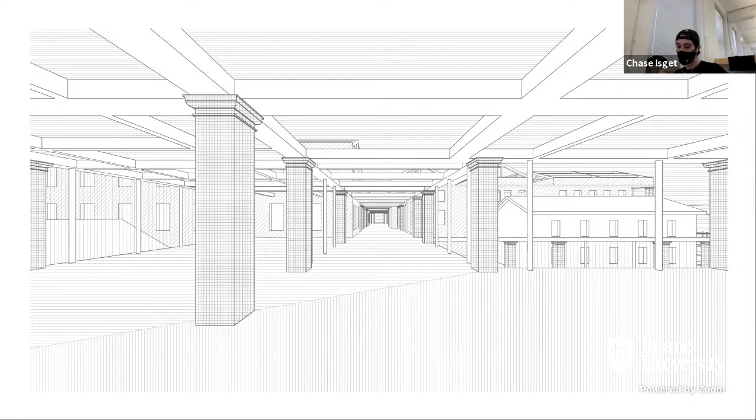Moving forward, we can see this method of representation employed to create a classically modern atmosphere and perspective view. Here, looking at the project diagonally from the opposite street corner. Here, standing at the end of the longest stretch of colonnade, and here in the student courtyard.

In all, this is a project which utilizes architectural devices that are iconic and ubiquitous to New Orleans, namely the column, porch, and courtyard, combined and arranged in ways that at once celebrate the architectural history of New Orleans, while also readapting them to create an equitable design that responds to issues of population rise and urban densification. And that's my project.

I don't know if it was. I really like something that you bring through the images, which is the unexpected transparency. I think that part was very beautiful because it was a turning point of what you're doing here.

Initially, I was reading the plans and drawings close to Kollhoff or Ungers, these projects and lobbies of postmodern architecture, which I think typologically is very interesting. So I think you did a very good argument, Chase, to arrive at this point.

I really celebrate that part. It is provocative at the point of empowering this imaginary of, as I said before, postmodern imaginary, but at the same time brings this idea of transparency, which completely destroys the embodiment of materials and other forms.

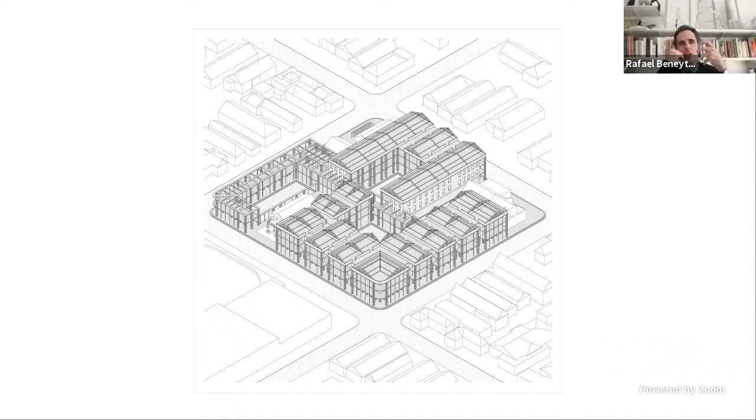Are you envisioning these colonnades being transparent as the artists that you presented? Yes, I think it would be really interesting, as we can see in this drawing here, to have the thicker columns expressed in this wire mesh, but then you would be able to see directly through it and see the pipe that's actually carrying the structural load.

Because in modern buildings that might have fake columns, it's hiding that steel pipe that is still behind it, so it's kind of lying to us in a way. But this material expression allows us to see the truth of the construction method while also relating to the historic context of the city.

Yeah, so I think it would be really interesting to have that transparency that you speak of. Have you seen the works of Leon Krier? I don't think so, no.

No, I think it is a very beautiful collection of drawings. I really love especially these ones with the clouds, presenting this perspective as a representational system to explore this architecture. I think for a second year student it's fantastic. I think maybe this threshold of credibility that the project has, as a combination of plans, sections, but also these drawings, is very high.

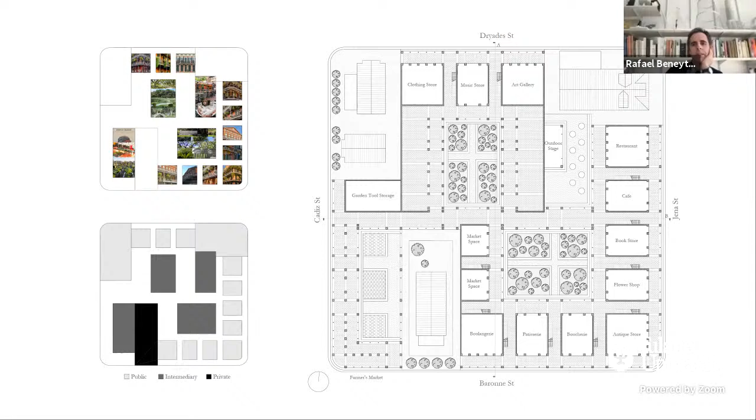Yeah, I would say that there were definitely inherent biases within this project for me starting out. I'm a pretty traditional person in terms of architecture, and historic architecture is something I'm very interested in. So we had a lot of conversations about translation rather than reiteration, trying to manipulate form and change it rather than reinstating what's already been done. So yeah, we talked a lot about that.

Great. Congratulations, I like it. I have to applaud your investigation, Chase, since I've been talking about materiality since the beginning of the afternoon. I remember seeing your project at midterm, and I'm happy to see that you took the second half of the semester to do this material investigation.

It's great to see that happening already in second year, where materiality becomes a very important component of the design itself, because that's rare.

Having said that, the inspirational reference that you're doing with sculptures, they are always seen in a context almost with no context. So there is no background. The background is the sky or the natural environment.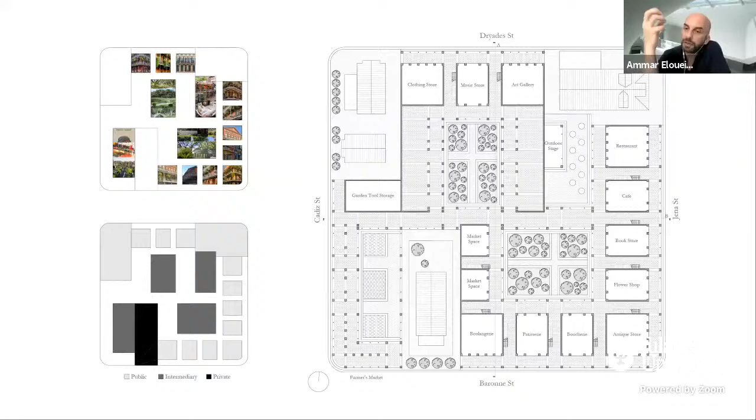And here, your investigation of these columns, the colonnades, is in reality, you have the building behind them, and the building is cladded with the metal. So the building is still very present, and the idea of the transparency is very limited to very select columns that you're presenting or selecting along the way, because the rest of the columns, the colonnade, are just the small support elements that are not wrapped with that.

I like where this is going. I think it's the beginning of something, and I would encourage you to try to push further the idea of materiality and investigating materiality in architecture. How does the diagonal seams on the metal cladding that you're suggesting on the building work with these colonnades that are made out of this mesh, and how the whole thing works together?

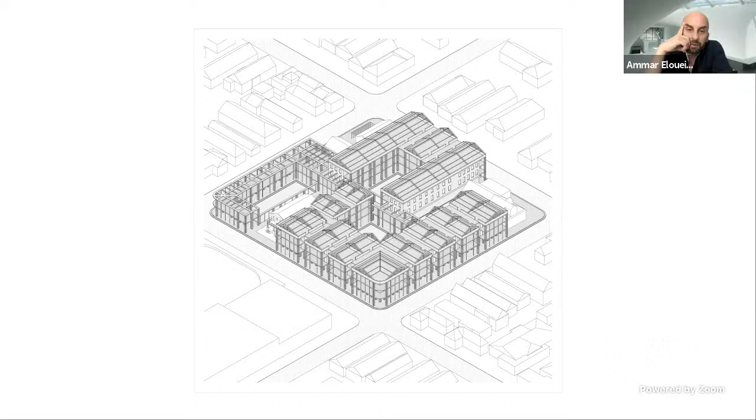You didn't talk much about the roof. How does that fit into the rest of the architecture? Maybe you can tell us a little bit. We see the pitched roof coming all the way to the front, and we start to read some of that. Maybe you can tell us a little bit about how you're envisioning this detail.

Thank you for bringing that up. The roof structure is kind of an important element of this project, but I was just trying to get my script together, and I hadn't quite got to that point yet.

But yeah, so you were speaking on how the mesh materiality of the columns is just kind of standing alone with the column and maybe not relating too much else with the building. But the mesh materiality of the column extends to the roof.

So my professor, Carrie, and I also had a lot of conversations about roof form and different options and what might work. Ultimately, we concluded that any roof form that made a volumetric space within was not really necessary, because the project is 3 stories high, and with that 3 stories, it accommodates all of the units that we needed to have. So there wasn't really any necessity for an attic space.

So I thought it best to have this open air tectonic roof form that would provide shade, so that you could utilize the roof surface as roof gardens for each of the units to access through the vertical core.

And then here, I think this works. So the mesh materiality of the column is also brought here to this pedimented facade, that is kind of yet another commentary on historic faux pas in architecture. A lot of times in Greek Revival New Orleans houses, you'll see this one really big grand pediment.

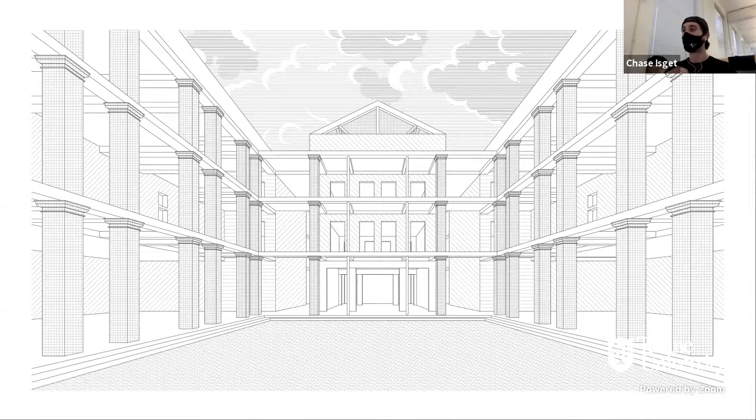It forms a barrier wall, a protective barrier wall, so you don't fall off of the roof. But it also creates this framework for vines to eventually grow up and take over the project, which in and of itself is another connection to New Orleans vernacular. There's plants everywhere, so I think it would be interesting to see plants growing all over this wire mesh, growing up the columns, going up to the roof.

I think this takes a whole different dimension now that you're mentioning this, because despite the effort you were showing in talking about materiality, I thought the columns were falling a little bit short in terms of standing against the mass of the building. Now that you're integrating the roof structure or the pitched roof into that mesh, that takes a whole different dimension.

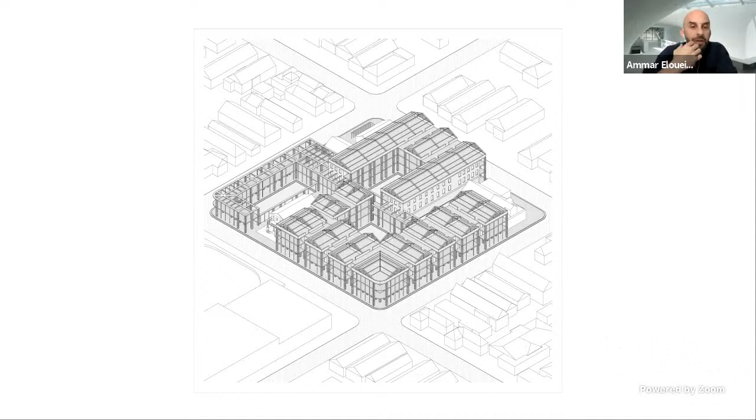I think it's an important and very interesting one, because now the columns are not in isolation, but become an element or structure of itself. I imagine it was very difficult to depict that in drawing forms, because the experience with light qualities throughout the day would render this in a variety of ways that could be extremely interesting.

So now you can imagine almost this cage that is set on the building itself, almost as if it's the shadow of the traditional sitting on what appears to be a very industrial interior or volume, if we're talking about metal cladding. This mesh is just the ghost of the traditional, encapsulating the new and creating a really interesting dialogue.

So I think it's really important, in the way you describe your project, to mention that, because now the whole project is taking on a whole different dimension.

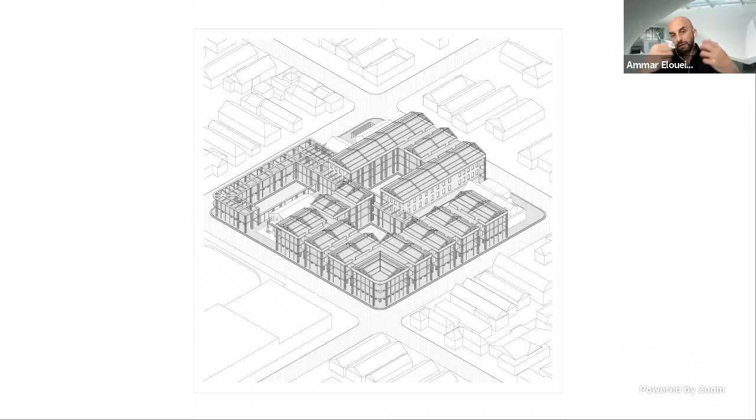Maybe you need to think about your narrative also, because it's not just the colonnade. To me, the colonnade and the roof become this one element that is the wrapper of that metal box inside it, which has the meaning of the traditional, the ghost, that is just the wrapper. So it's really important to weave that into the narrative.

Yes, definitely. I love that it's becoming this sort of wireframe building, which comes out of a celebration of local typology. I absolutely appreciate one of your first drawings where you go and draw the elevations of the existing buildings, which is a super mature and invested process of really understanding what is there, instead of simply representing them as volumes, as we could expect.

And then taking this building and breaking it apart and bringing it back as a new sort of statement. But if we follow the steps you're taking, it becomes something completely different. It becomes this kind of three-dimensional framework where many things could happen in very unexpected ways.

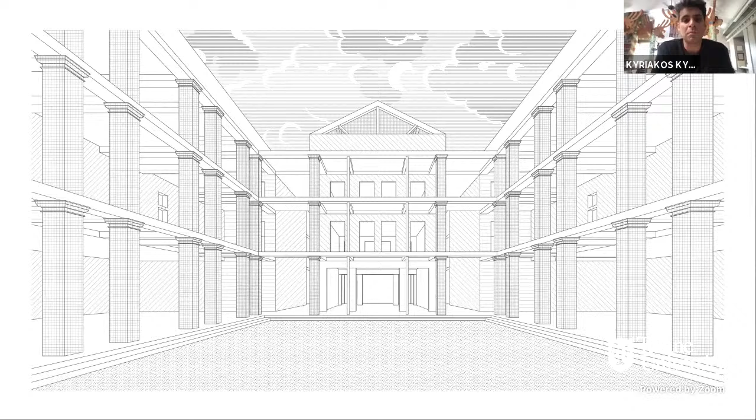I'm wondering if your perspectives could work more towards less austerity and less rosy, but actually implying the ways this is being occupied, either by the possible growth of vegetation vertically or horizontally, but also by the potential misuse by the tenants or the potential inhabitation in more intimate ways, where people might start hanging things from the wireframe or interpreting them in ways that are not necessarily part of their absolute pure nature.

I think this idea of controversy you're bringing, of a column that is a column but is not a column, could expand also in your understanding of how the project is being inhabited, and I think that could be super fascinating.

I would like to drop a comment inspired by this work. The more I'm getting into the project, I feel it's a beautiful encounter where architecture is the embodiment of all these things. As you were talking about the materiality, bringing these colonnades, and Kyriakos pointing to this thing of drawing the things to learn from instead of the volumes.

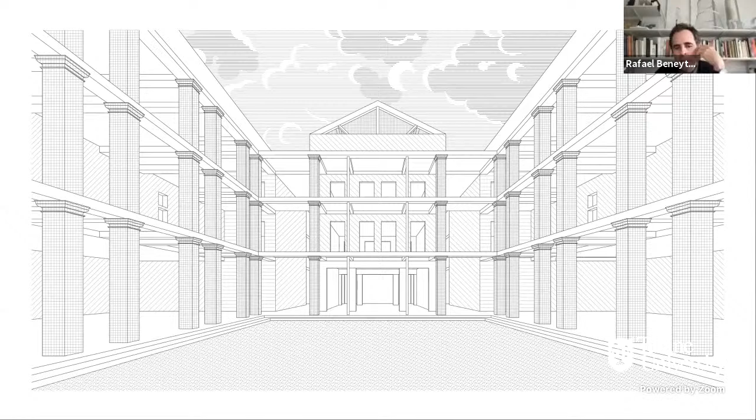And the comments Ammar is opening with on materiality too - it looks like a very good example to talk architecture beyond its formal intentions, but also as a place or net where things are getting more and more woven. I love how this project is weaving the relationship between history, typology, and materiality.

For example, there's a particular detail here, the floor plates. The ceiling and floor plates are drawn as deserving attention, but the thickness of them is not exactly what will be related to these ceilings, though completely doable technically. So there's a symbolic layer that this project is representing very well, while bringing in other multiple layers of things related to what we've been discussing before, right?

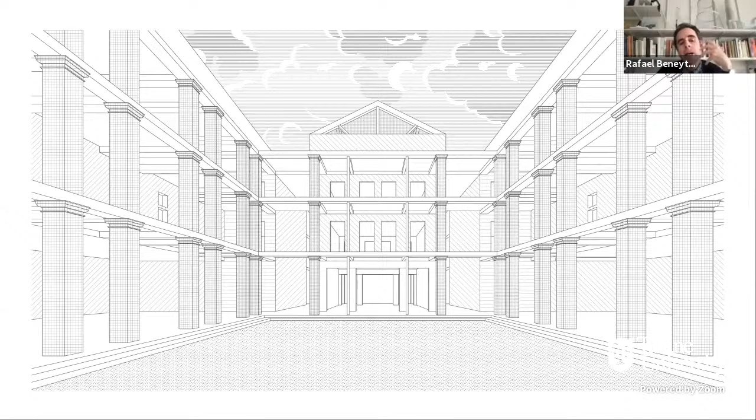And I like how this project empowers the multiplicity of things related to temporality in architecture, for example, versus style, versus materiality, opacity versus transparency, and so on. I don't know how conscious you are of these things, but I do like how this project is so in relationship with its own mode of being and the past of this history, right, of this perspective, for example.

It empowers more and more the idea that architecture is beyond the form, it's how it establishes an embodiment of surrounding things that are physical, but also temporal, cultural, historical, and so on. So I really celebrate this exercise.

So now I think this is really interesting. Can you go back to the image you were showing before? Because now we're going beyond the materiality into the tectonics, the idea of how things are put together. And I'm wondering to what extent I was making my own reading of your project, which is interesting—even if we're talking about the same thing, multiple projects can come out of what you're describing.

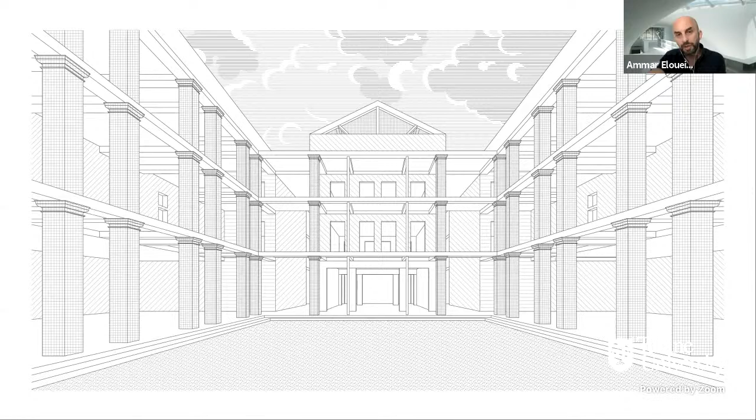So all of a sudden that choice kind of goes against the idea of the wrapper, the encapsulating box. The fact that you're showing the slab edge maybe also goes against that. So, to Rafael's comment, I don't know to what extent you're conscious of all the details or the choices you're making, and how important they are at this level, and become important—it's not just about graphics, it's about concepts and ideas and how they're interpreted or implemented in architecture.

So obviously there are possibly multiple projects here, and we're all kind of going our own way in reading our own ideas of what this project is, which is really interesting at this point, considering it's a one semester project and where you are in your education, to bring all this into the conversation.

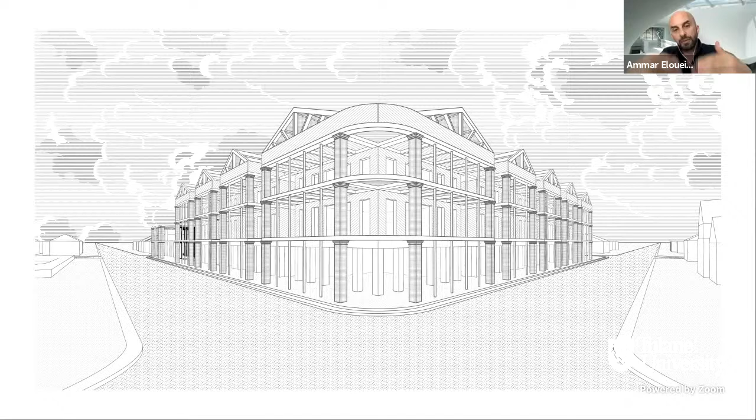This is really interesting, and you should be applauded for it and aware, and try to, moving forward, build on that. Because if you're saying you're interested in more traditional architecture, and you're doing this material investigation that questions the way we perceive traditional architecture, that's a really interesting topic you can carry on for your entire career.

And just the fact that in a project at this level, we're beyond the planned organization of spaces and whether they work or not—we went through this at midterm. The fact that we're having a much more fundamental conversation about architecture and what architecture is, is to me really interesting.

These are great comments, particularly a great comment to end on, and Chase and I greatly appreciate the generous comments on this project. Ammar, I'm particularly pleased you got to see both the mid-review and the final review of Chase's work. I think his project sort of taps into territory that your own research investigates with your research studio.

Chase, I just want to say it's been delightful speaking with you throughout the course of the semester. The term maturity was thrown around during your comments, and that term really, when I think of you, I think of maturity—you are a very mature designer, with a very mature sense of self and what your interests and passions are. That's a really remarkable place to be at such a young age.

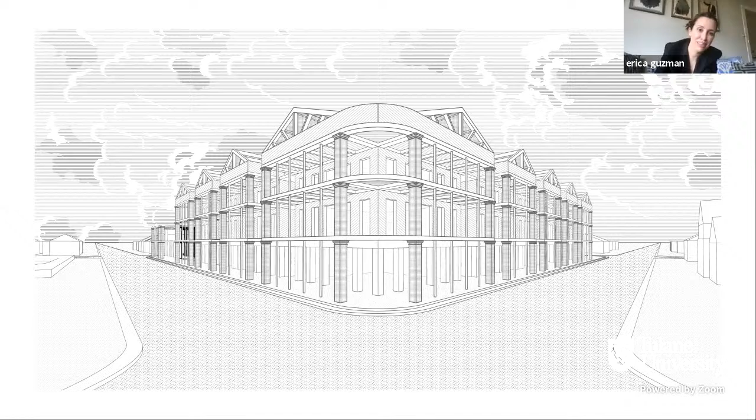Yeah, thank you, I echo this voice. Thank you for all your feedback. Oh, thank you, thank you for having us. Yes, thank you very much. Excellent dialogue, you all have a good day. You too. Yeah, thank you.